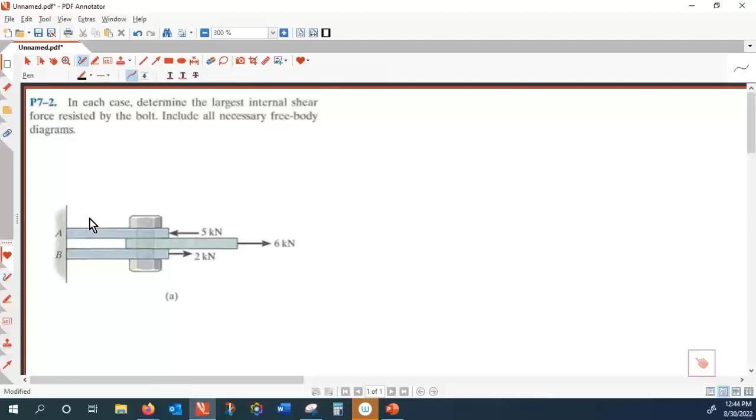Okay, how many members are here? We have one, this is number one. That is number two. And this is number three. And the bolt is number four. Okay, so let's see them side by side.

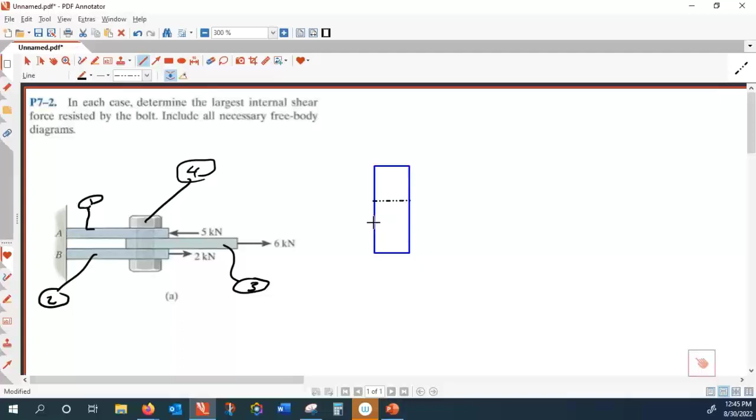All right, if I consider the bolt, this is the bolt, and then there are two shearing planes here. The first shearing plane is from here to there, and the second one is from there to there. And here, the middle part is experiencing 6 kilonewton here, and then a 2 kilonewton.

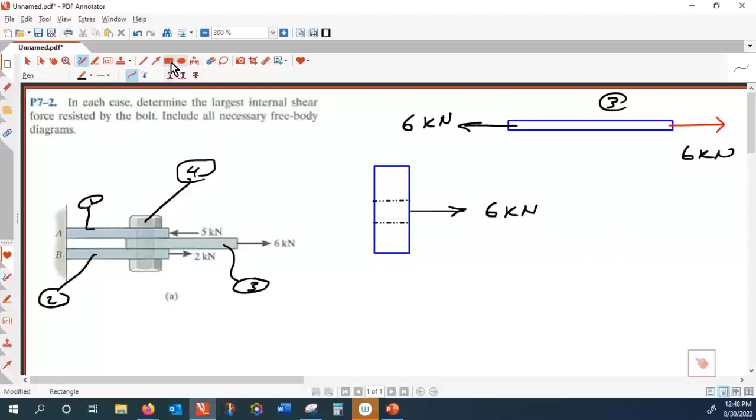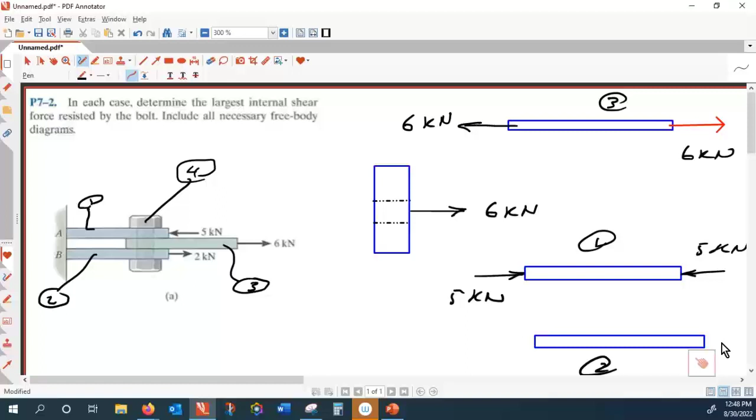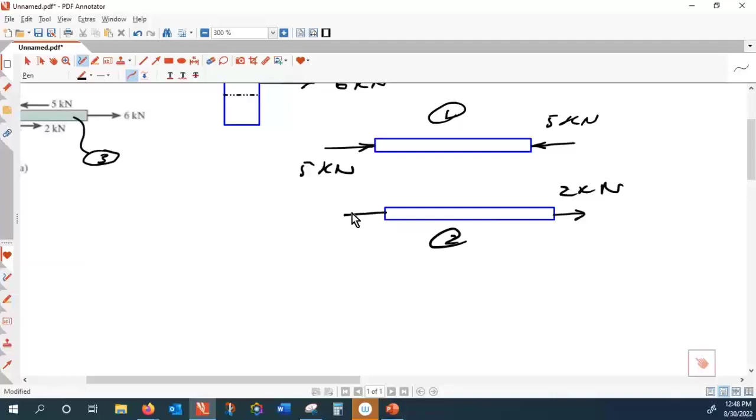And then if I release number 1, it has 5 kilonewton applied inward, and therefore there should be a 5 kilonewton that way. And then I release number 2. It has 2 kilonewton here, and therefore the reaction here is 2 kilonewton.

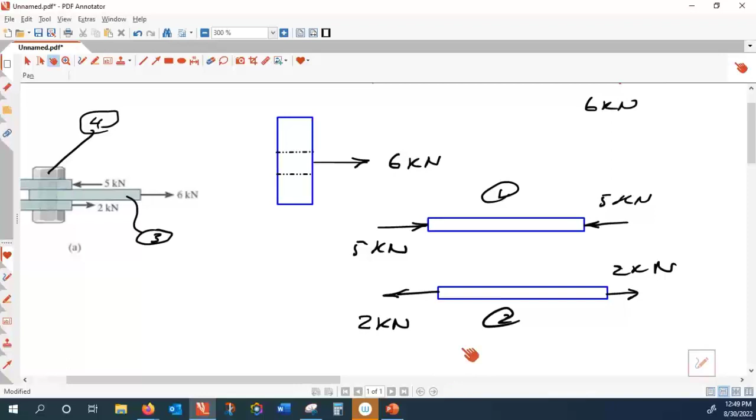So therefore, the pin would be experiencing the forces in the reverse direction. So as a result of number 3, 6 kilonewton would be reversed in that direction.

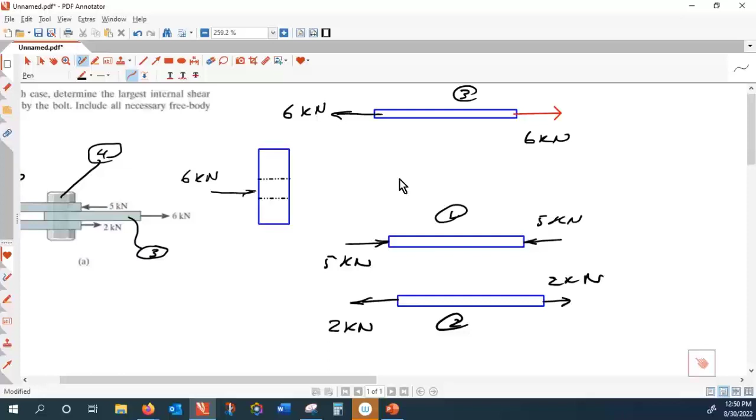And then, so if I release the entire structure, I think the only way we can solve this is by making some assumption. And that assumption is I'm just keeping the bolts inside. If the bolt is not released, then there is no need to include the internal forces.

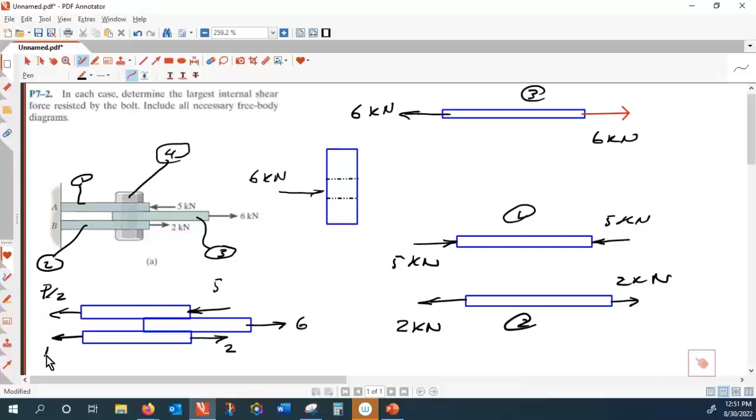But that is 6, 5, and that is 2. And here I assume that the reaction at the wall would be uniform. So let us take this one P by 2, and this one P by 2. All right, so that would tell us how much force is needed to keep the entire thing under equilibrium.

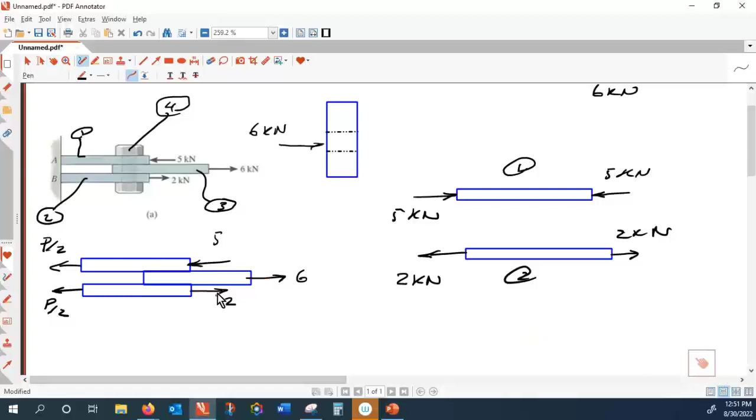So here I have sum of the forces horizontally equal to 0. That is net forces horizontally equal to 0. That is minus P minus 5 plus 2 plus 6 is equal to 0. So that is minus P plus 3 is equal to 0. Therefore, P is equal to 3.

Okay, if P is equal to 3, then with that, we could find 1.5 kilonewton here. P by 2 over there, and then that is how much force is experienced by the bolt.

So let me release this number 1. With number 1, there will be number 1 at the support A. We will have a 1.5 applied here, and now there is a force which is exerted by this to the bolt, and we don't know how much that force is. I call this F1, right? So how to find F1?

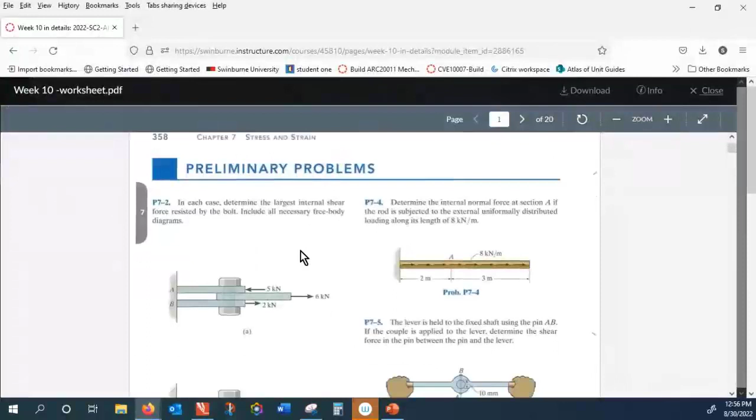So if these forces are not equal, the problem would be a little bit different, the solution. Let me get back to you on this one, which one is the case. So, 7-3.

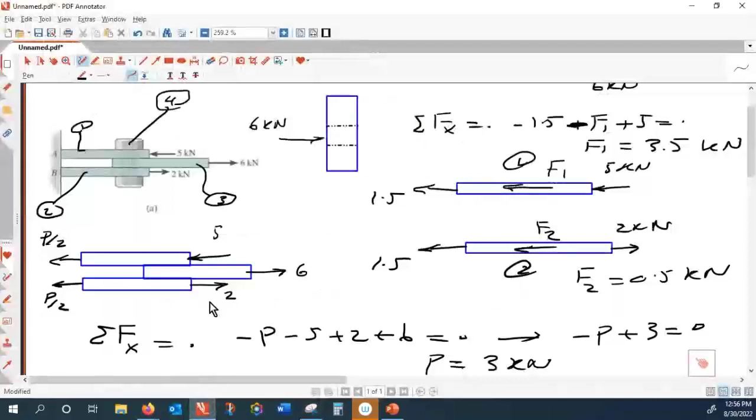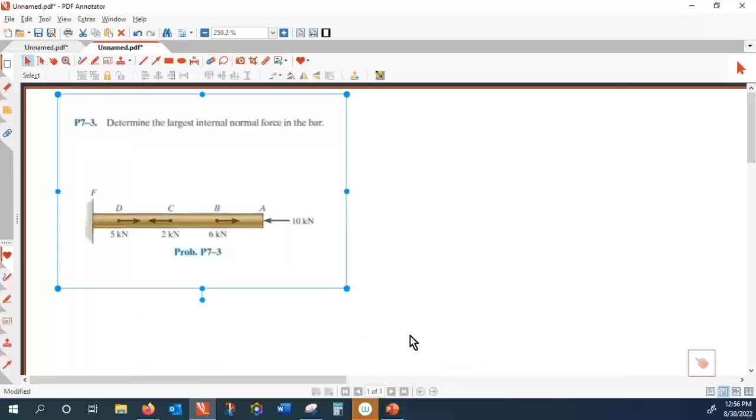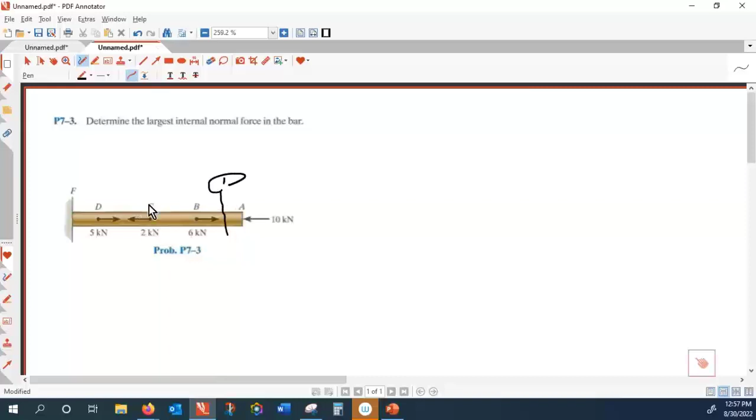Okay, here we have a number of different sections. So the internal stress changes between A and B, that is section 1. This is section 2.